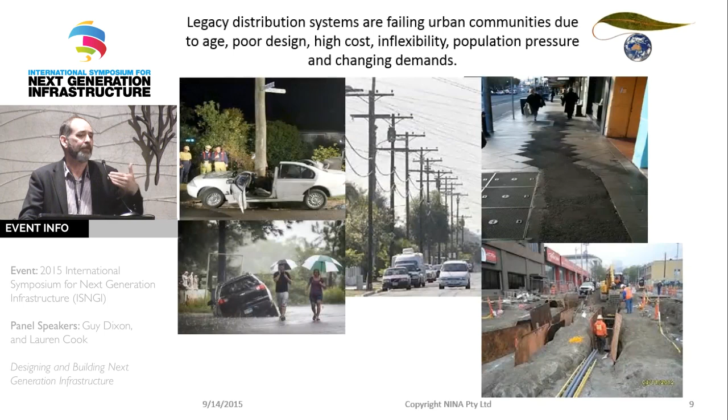There are 4 billion people living in cities now, and we have to start doing something. So let's start rethinking from the ground up.

I'll just jump through there. Civil costs, as I mentioned: 60% for broadband, 70% for water systems, 50% for power upgrades, 70% or more if you're moving underground, and stormwater is dominated by civils.

And we simply can't afford to be solving problems one by one. In Australia, for example, to dig up the streets to put one system in, such as the National Broadband Network, the civil costs are around $50 billion. Go to multiple systems - electric cars, grey water, etc. - and it all becomes cost prohibitive.

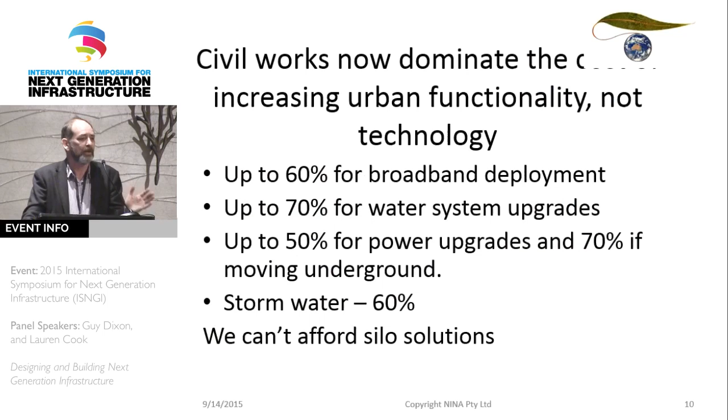So, I'll go to a picture. We need pictures, sorry. Here's the invention: the NINA access pathway.

So what we're doing is redesigning the curb and gutter. The curb forms the boundary line between the road surface and the pavement - if I say footpath, that's what we say in Australia - and the pavement. So let's reconsider our usage of that space as a multi-utility access system.

So the basic elements are, we have on the left-hand side a water channel sitting below the gutter, and that captures road water. If we capture road water and manage it separately, road water is only 15% of urban rainfall, but it carries 90% of the contamination of that urban stormwater.

So on the outside channel, we've got what I call the brown water channel, and on the inside, we have the clean water channel. Clean water comes primarily from rooftops, and typically the residential block's surface area will be 35% roof, which has perfectly good water falling on it.

The next channel just inside from the brown water channel is a power systems channel. So now we have at the curb, still tracking around all of our transformers and bits and pieces of the established grid, we've got the capacity to put in 3 different types of network.

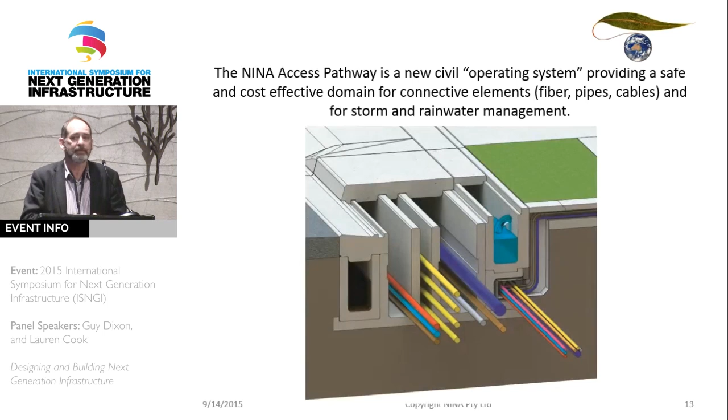But we also have a channel, so we also have space there for gas systems - so clean gas, so energy, gas, water, information, co-located in a common architecture. And so here's just an example: clean water, dirty water. Let's separate the two, manage them differently.

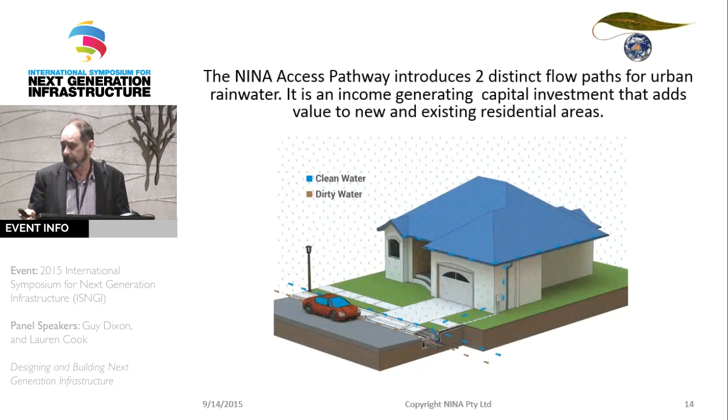Now we can start to think about the urban environment in a new structural unit, and the one that I've looked at is basically the residential block. My background is naval architecture, and for me, I like sort of things with defined populations and a nice boundary around them, and the fact that it's not floating just means it's not as interesting as a boat. But anyway, so this new block now has a series of dimensional characteristics which are really important to find out.

We had to survey 250 blocks in Australia to actually find out what the national average looked like. I did a similar study for California, and I've got the same metrics now.

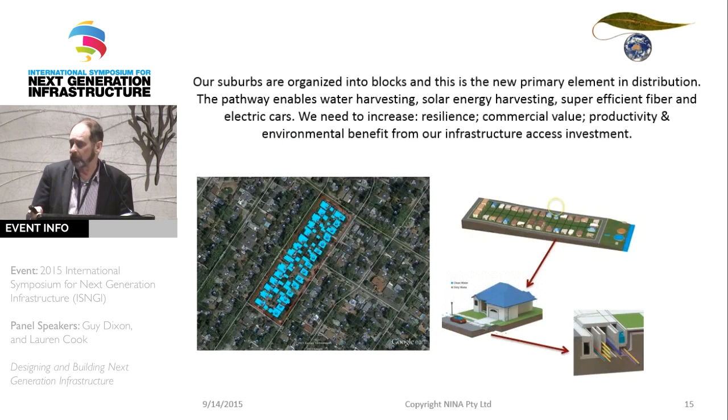With that data, we can now look at what the rainfall is. We know the area inside the curb boundary, and we can estimate what the annual water input into that block is, separating both the dirty and clean components. So we're integrating the block as a new, largely water and energy self-sufficient unit, and we'll be looking to integrate those right across the board.

The other thing is a lot of people have talked today about resilience, and resilience is we now have to redefine resilience in an environment of uncertainty. As much as we've spent globally more than $500 billion on the problem of climate change, we still have very little hard data to work with. So we have an environment of uncertainty where we're told things are going to get worse. We don't know how much worse, but we need design metrics.

The best way is to say, well, what's the safest place in the urban environment in which we can locate our utility services? And that's what we've done. We've taken the point where there is zero wind by scientific definition, otherwise you're ripping the atmosphere off the planet, and we've removed it from the threats of fire, we've removed it from the threats of flooding because we're managing the flow of water better in the urban environment, and we've removed power lines from the threat of having trees blow over them.

So in terms of resilience, this now looks a little bit like the old First World War slit trenches. On the front line, you got into a little narrow trench and that was the safest place to be, even when bombs and cannons were going off around you. So from a survival point of view, we've now dealt with those issues very specifically.

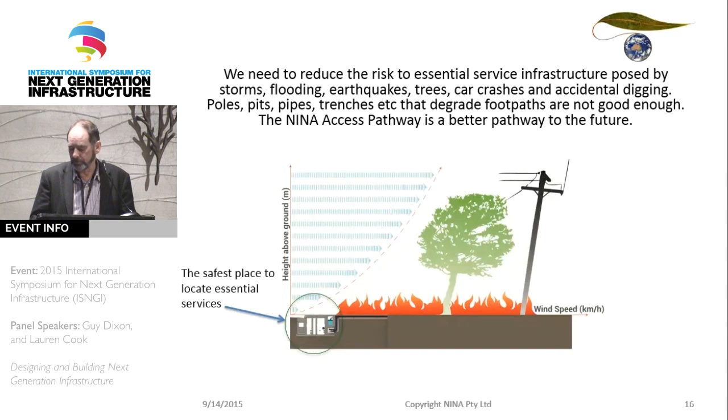We also have a new economic model because all of a sudden we've got an architecture with a range of functional capacities. So what we're looking at from an economics point of view is economies of scope. If these systems are sharing - we've got clean roof water as a resource, we can pay households to supply it to us and encourage them to be efficient. We've got road water as a community resource, small volumes, dirty, easier to clean. We're no longer pushing pollutants into riverways.

We've got a space for power systems - they're a new class of tenant in this commercial property. This is commercial property and the layer 2 elements are tenants in it that pay a lease charge. They get a lot of advantages from being there. There's no weather damage, there's no car crash risk, and the shared capital and operating costs in this environment, from all of our research, are much, much lower. So everything is working in a known, defined space.

We have in the world at the moment a very large number of applications - clean water, filtration, solar, electric vehicles, smart lighting. What we lack at the moment, though, is an operating system for all of those new technologies to work economically. Big data is great, but if big data is really expensive, then it doesn't really work. Smart cities need smart access in order to function economically and efficiently.

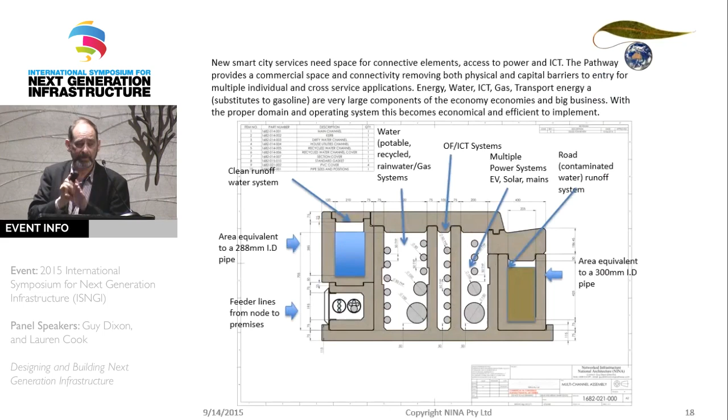I'll just give you some idea of the scales. Down at the bottom in the power channel, that's an 11 kV power line. It goes all the way up to 240, 415. Lots of space for fiber, lots of space for water systems, and a feeder, a redistribution channel. That side open channel is where things come out of it, and then the small feeder lines, to households come back along, and then they cross the footpath directly. So lots of stuff in one small space.

And we can't afford that. We can't afford it at a national, state, or community level. So we have to think about economies of scope and integration in order to make things work from a financial point of view.

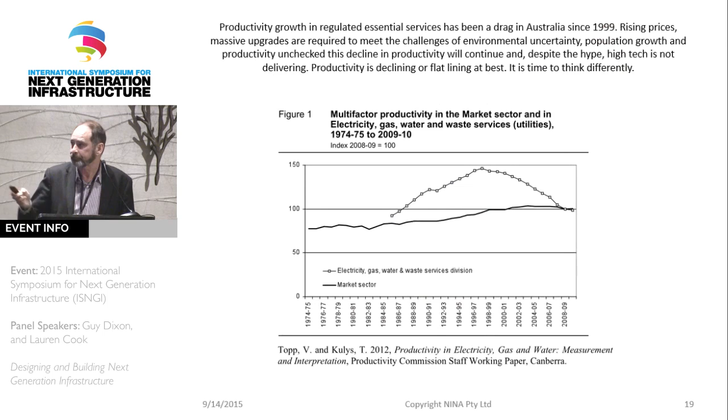I'd like to talk briefly about saving California. From my point of view, this is the first global-sized economy to go water critical, meaning they're having to sacrifice the supply of water to one sector and take it away from another. Even though agriculture accounts for 70% of California's water use, it's accepting a 25% cut. Residential and commercial are accepting a legislated 25% cut. In that environment, it is very difficult to consider how you build long-term growth and economic security in a state that is drying out.

In the city of Sao Paulo in Brazil, they were cutting water 3 days a week. It's a city of over 9 million people, and a lot of them live in high-rise. No water in a high-rise means you've got to go down 10 flights of stairs to find a toilet somewhere. It's an ugly situation to be in, but these are real threats that are taking shape.

California is particularly well suited, as is the United States, because you guys love organizing yourself in rectangles. You're the best at it in the world, and I congratulate you for that. I was able to get a snapshot of over 100,000 households because I could find about 50 locations, all with identical blocks, and they were massive. So there's just some examples there.

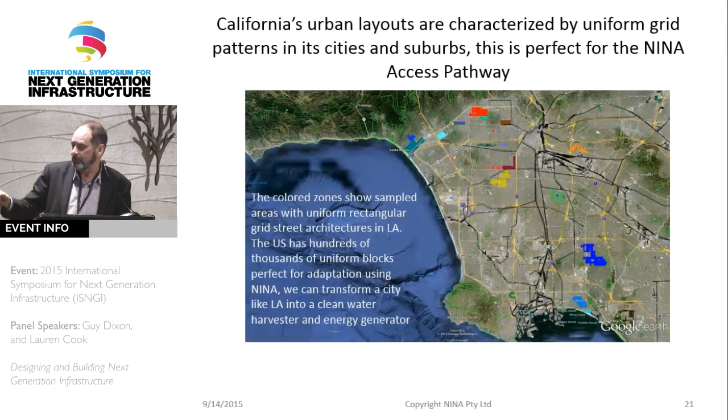So what sort of numbers do we get? In California, you've got around 18, 19 inches of rain per annum. That's a population-weighted average. When we're looking at a state level, we need to know how much water people are getting where, so the population weighting is very important. It gives you an idea of roughly what you can do.

You've got a perimeter of about 626 meters, 2,054 feet—I'm struggling with the old units here—but about 36 lots per block. And roughly speaking, there are 324,000 residential blocks in California alone.

So if we adapted California with the NINA access pathway, we'd get a roof water yield, at 35% roof area ratio, of around 1.1 cubic kilometers. That's 1.1 billion cubic meters of water, or 1 billion tons, just under 900,000 acre feet.

We can clean the road surface water—that's another half a cubic kilometer. Then we've got other surfaces around the block where we can pick up water, commercial buildings where we can pick up water, and then leakage reduction. At the moment in California, you're losing around 15, maybe 20% of your water, and that's considered the norm in America. It is not good enough for a water-constrained world to lose that much water.

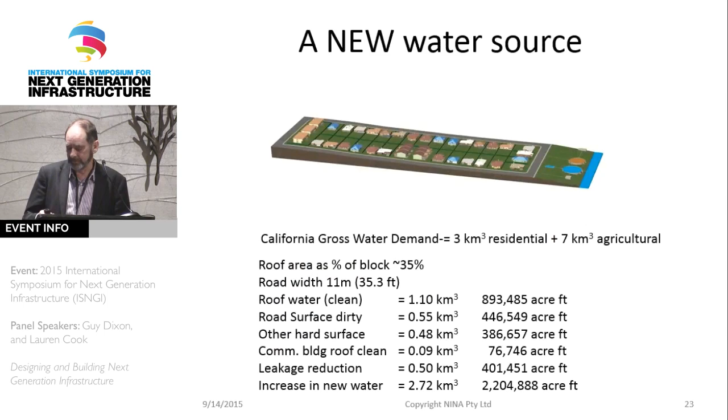So let's talk about and think about fixing both of them at the same time. This is basically what we're looking at: water generation, energy generation, super efficient distribution, and a massive increase. So we can start to talk about a new energy future. There is something like 77,000 gigawatt hours of electricity, unused potential on the roofs of California. So that's a big game.

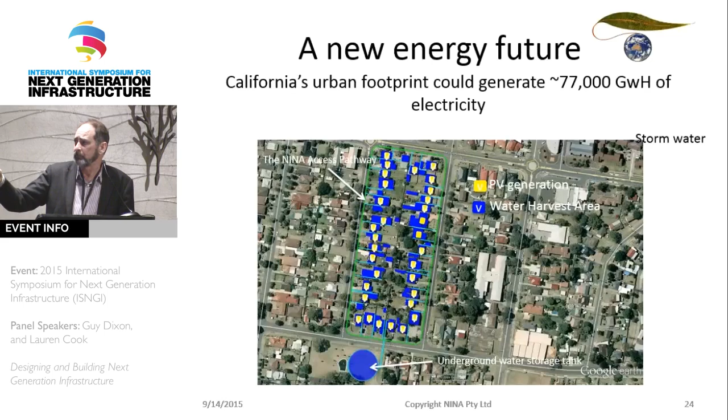We also have a new networking future. Networks are traditionally built on root and branch architectures. With the NINA access pathway, we're now putting effectively a loop around every single block, and loops are connected to loops. That means it's essentially indestructible. From an optical fiber point of view, it is indestructible because there are so many pathways between any points of A and B, and there is so much fiber there that you really can't damage it.

From a power grid transmission perspective, we need to be thinking in terms of research about more efficient, low impedance distribution networks. Nobody's done any work. I talked with an Australian power company - they've just spent nearly $3 billion upgrading their network, and they've still got 5% distribution losses, the same that they had. It's not good enough for the 21st century. One of the great research opportunities available is what do low distribution loss networks look like in the 21st century.

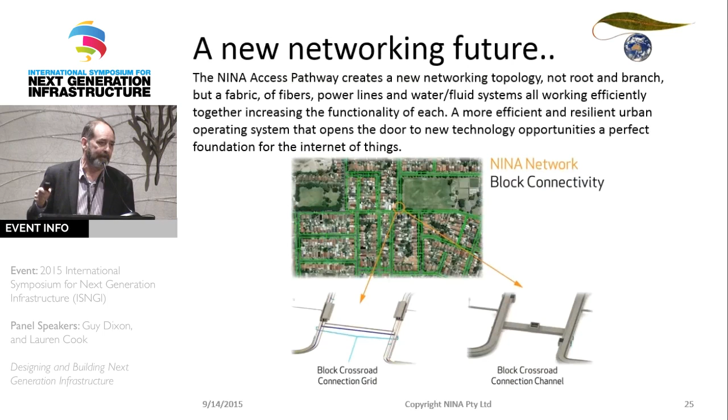So I think I'm going to have to click through. Health benefits: imagine a world where we have clean air, clean water, low noise, and we don't trip on the footpath and fall over and break our hips. That's a $1 billion cost to the health system in Australia alone. And we've got low toxicity in our natural waterways.

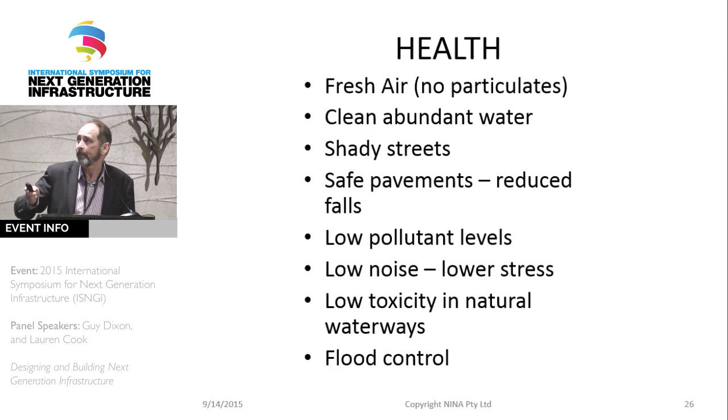Environmental outcomes, a path to carbon negative. If we combine urban adaptation and rationalization with a process of defragmenting our natural ecosystems - by that I mean we carve around little forest pockets, isolate them, and effectively they die - so a process of reconnecting the forests, getting the urban environment working, and stopping the drain of water out of the natural environment. Taking water out of the natural environment degrades it.

One of the least understood and least recognized forcing mechanisms in climate change is that over the period where we've seen an increase in atmospheric carbon, it perfectly correlates with the buildup of dams. We're concentrating water in dam systems, using it for agriculture, which doesn't store carbon in the environment, and we're removing from the natural environment the mechanism by which natural environments grow and sustain themselves.

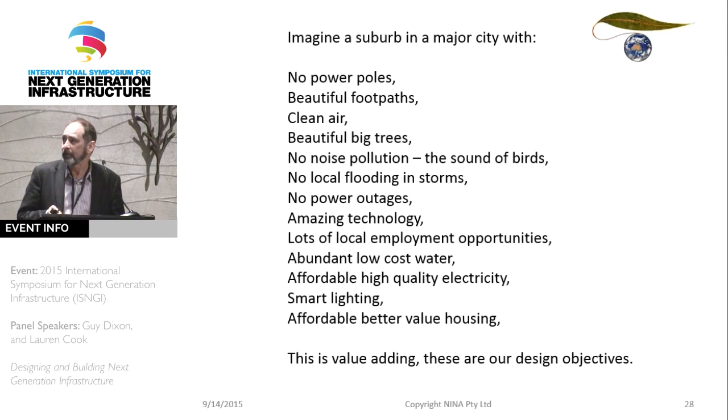So: no power poles, beautiful footpaths, clean air, big trees, no pollution, no flooding. We retain water in the environment, we don't allow it to flood, we don't allow it to overflow sewage systems, lots of employment, all the big tech you want. It's a good thing, and a better economic future.

The proposed financing model is that communities develop it as a property trust. You buy a unit in it - it might be the Capitol Hill South Infrastructure Access Unit Trust - but you buy a unit and you get a rate of return on that unit. That takes the funding burden away from central governments and gives a new opportunity to invest in a high rate of return business for local governments.

And if the community and the local government don't supply enough funding for it, then you open that up to pension funds and dedicated or specialist investments. It's a long-term, 100-year plus asset with a steady income stream, not reliant on the number of customers, but reliant on the number of tenants in the system.

Works better all around. The details of economics basically show that in Australia, for example, we already pay around $175 per month for embedded passive access civil infrastructure - poles, pits, pipes, trenches. Trenches dug 100 years ago are still at full book value; in fact, they raised them in value. So we're paying a lot of money, and this system costs around $12,000 per household in Australian dollars. It's got an income stream of about $1,800 just on the legacy utility services.

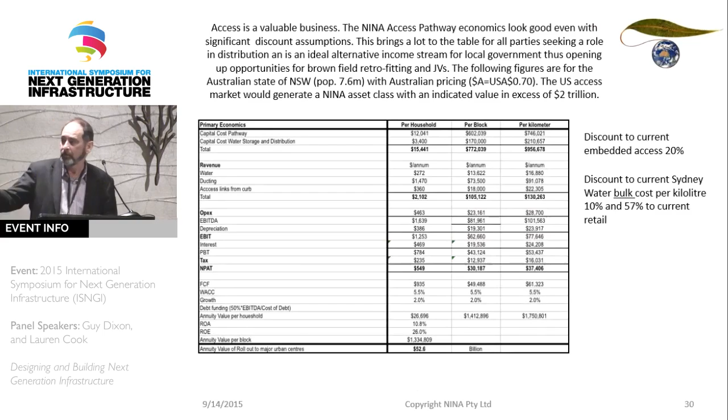So I think I've got to wrap up there, but quickly: there are lots of different layers of economic benefits. I think I've said all that before. So thank you very much.

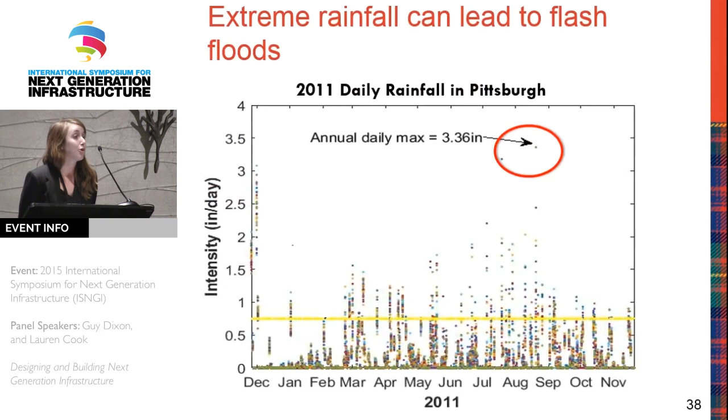So this is an example of a year in Pittsburgh in 2011. This is the daily rainfall, and I'm going to draw your attention to that little arrow. This is the annual maximum rainfall in Pittsburgh in 2011. This rainfall caused a flash flooding in the area, which led to 4 fatalities. It was a very sad event. A family got trapped.

So what did we do to resolve this issue? Well, we put up a sign, and this sign flashes when there's high water and says you cannot travel on this road. Now, some engineers would say this is a very good low-cost solution to prevent fatalities, and others would say that we would need to redesign the road since originally it was designed to be in a stream bed.

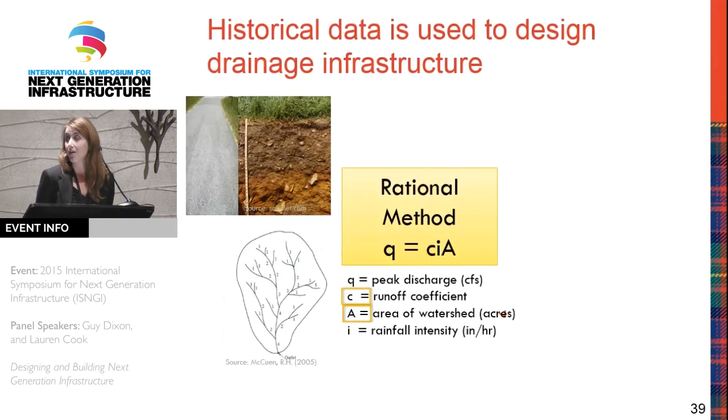So how do we currently design stormwater infrastructure today? Well, an older method is called the rational method, and what goes in is what we call a runoff coefficient, which is essentially the soil type. We also put in the watershed area, and what else goes into this equation is something called the rainfall intensity, which I'm going to talk to you mainly about today. How do we get these rainfall intensities?

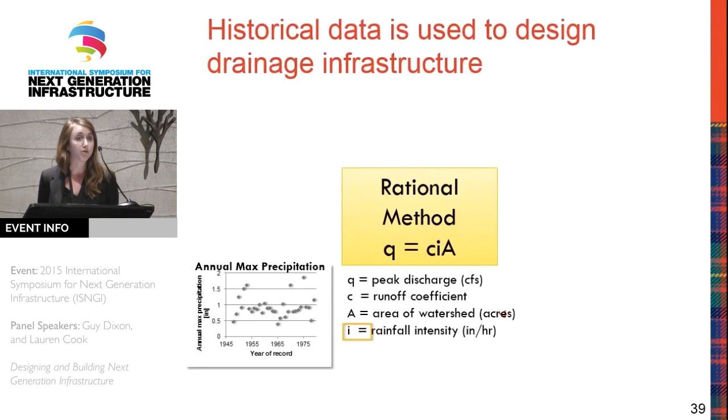Well, we start off with a historical record, and we usually take the maximum annual rainfall for the past 100 years or 200 years if we have the data. We take this annual maximum and create something called an intensity duration frequency curve, in which we input the storm duration that we'd like to design for, and we output a rainfall intensity, which we input into the rational method.

From this equation, we can get something called peak discharge, which is the very top maximum point on this curve, and under the curve is the total runoff volume. For those of you who are unaware, the difference in rainfall volume and runoff volume will be the amount of rain that is infiltrated into the ground. From this peak discharge, we can design things like culverts, or maybe even the stormwater management of the future, as the former speaker presented.

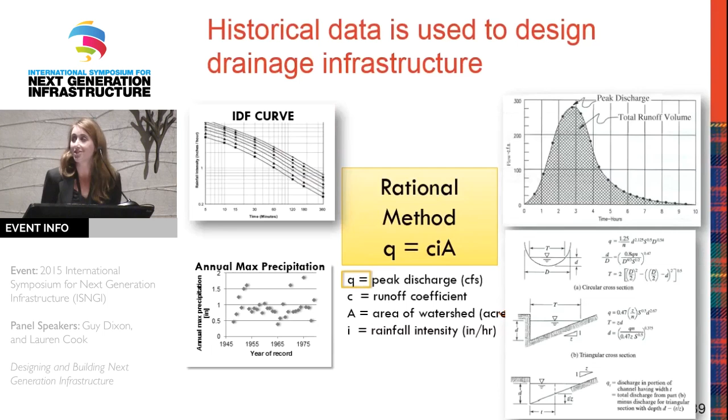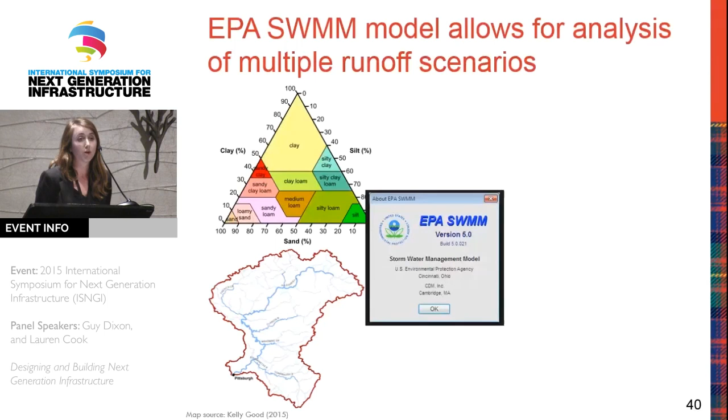But this is great, we have peak discharge. What else can we do with this? Well, we have another model, the EPA's model called the Stormwater Management Model. With this model, we have the same inputs, soil type, watershed area, but a little more complex. Instead of using an intensity duration frequency curve, we use a rainfall time series, and we can change these time series to test different years.

We can test a dry year, a wet year, or an average year, for example. And what we get out is peak discharge or any discharge, but on a time series, over a year or over a month, to see if our infrastructure can withstand the rainfall we're inputting into it. So this is great. Any hydrologist will say they love the SWMM model, and if we could go on using this forever, then my talk would be over now.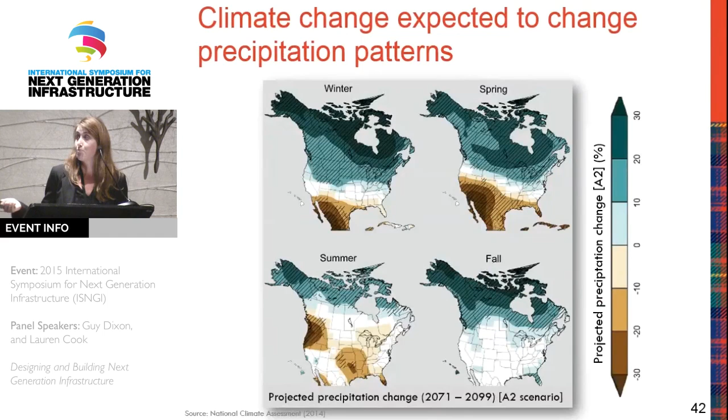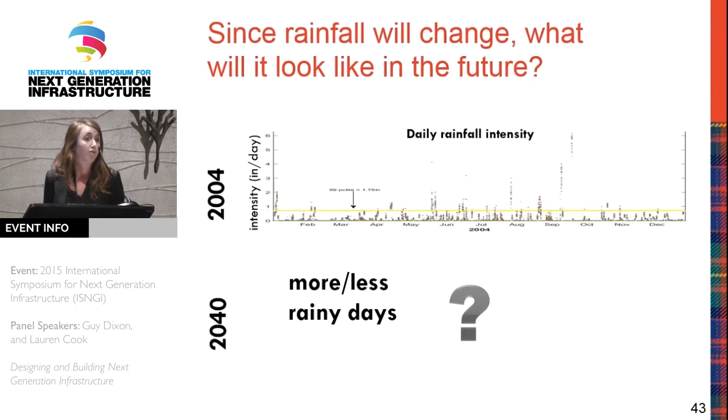So that brings us to one of the questions: what will rainfall look like in the future? Because we need this rainfall to design stormwater management in the future. If you asked me 20 years ago, maybe I'd say it'll look like historical rainfall. But if you ask me now, I'm going to say maybe we'll have more rain days in the future, or we'll have less. Maybe we'll have an increase or decrease in total rainfall throughout the year. Maybe we'll have more extreme storms, more rain coming down at one time. Or maybe we'll have longer periods between rain, just like we're seeing now on the West Coast.

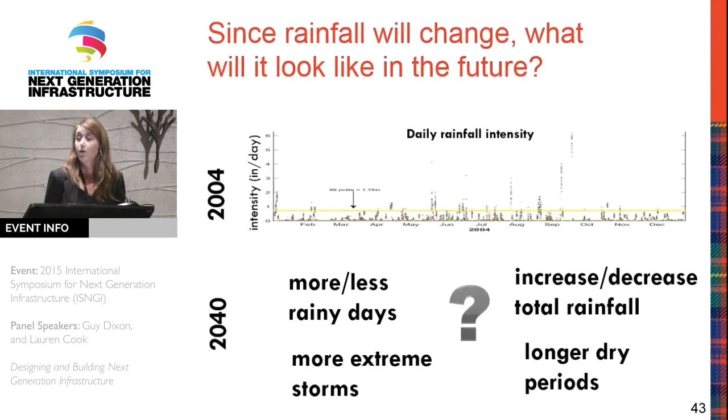This brings us to our research question: how can we use this data from climate models to inform rainfall for use in stormwater design, or really in any type of design where you would need rainfall information?

So we're looking today at a case study in Pittsburgh, and what is interesting about Pittsburgh is that it has very intense microburst storms, it has very steep slopes, we're in the mountains, and this leads to what I showed you earlier, flash flooding and fatalities.

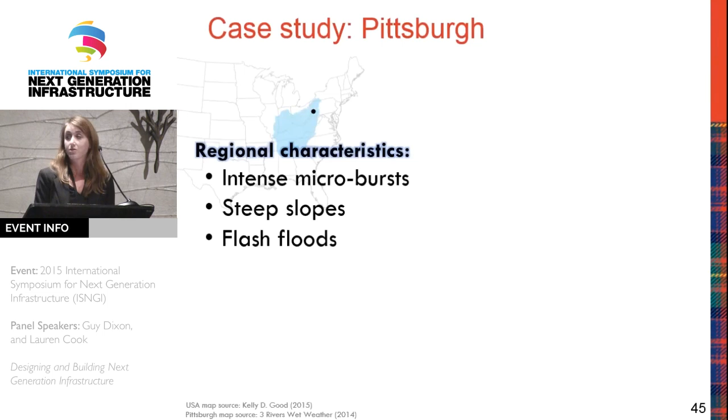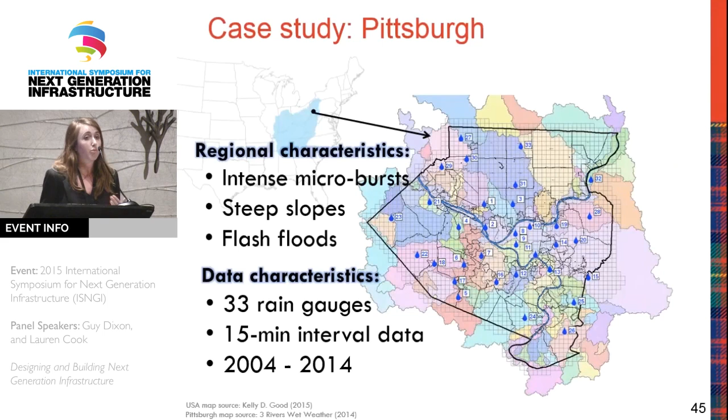So here we are in Pittsburgh. This is what the case study area looks like. We have 33 rain gauges. We have data on a 15-minute interval. This is excellent quality data, very small time step.

And we have it from 2004 to 2014. So one of these rain gauges, one of the 33, it looks something like this.

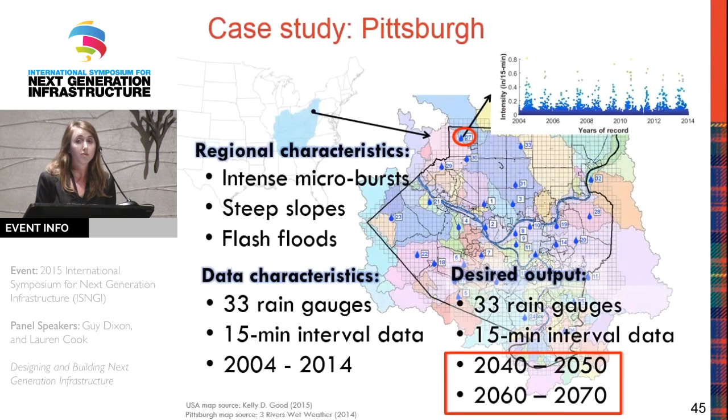Very long data set, and again we have data like this for each of these 33 gauges. So what do we want out of this? We want the exact same data, 33 gauges, 15-minute, but instead we want it for two future time periods, 2040 to 2050, 2060 to 2070.

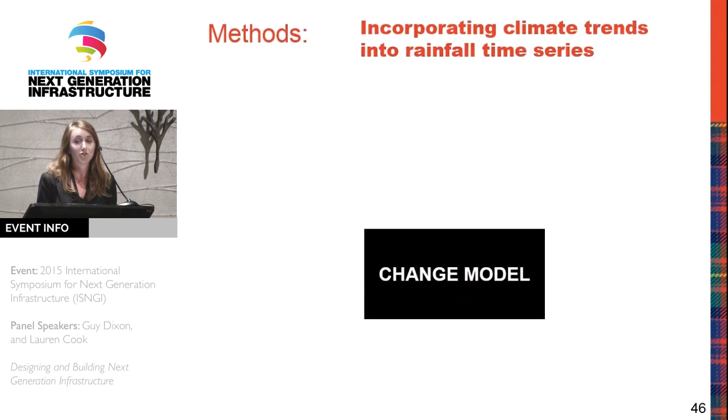How do we plan on doing this? We're going to use a model. Just think of it as a black box for now. We call it the change model. What goes in is the observed data. What comes out is two future time periods of rainfall.

How are we going to manipulate this? We're going to use climate data. We're going to select two different climate models, which I'm not going to go into big detail, but I will bring to your attention that these climate models are on a 3-hour interval, whereas the data we have is a 15-minute interval. Now I'm going to tell you just a little bit more about the climate models before I go into what is actually within the model.

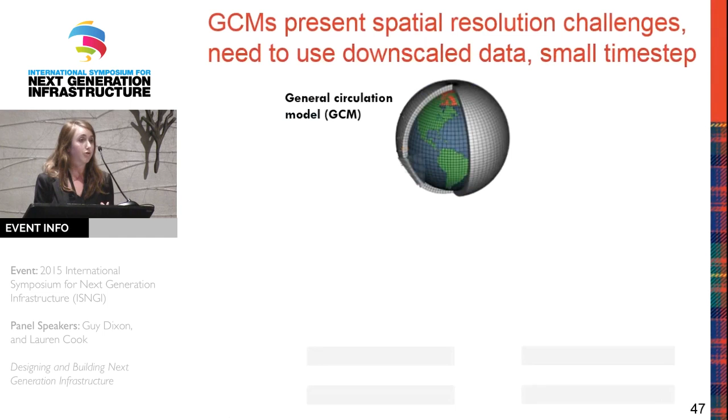But this is still too large for us as engineers to use, so we need to do something that's called downscaling. And there's two types of downscaling. I'm not going to bore you with the details, but one uses physical equations, which is called your dynamical downscaling, and one uses empirical or statistical relationships, and this is called statistical downscaling.

In the US, there's two different big data sources that have climate model data available: the NARCCAP, which is the North American Regional Climate Change Assessment Program, and there's also Reclamation CMIP-5 data, which is your statistically downscaled information. Today I'm going to talk to you about NARCCAP data. Why did we choose this NARCCAP data? Well, because it's on a 3-hour time step, and this is the smallest time step that's available in the US for a climate model today.

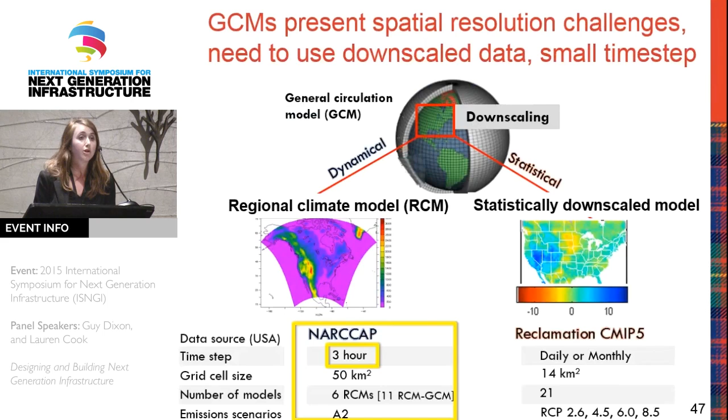And also what I want to bring to your attention is that within this data set, there are 6 different regional models to choose from. During the research, we selected 2 of these, which were closest to the observed data. I'm not going to go into this right now, but if you do have questions, I'd be more than willing to talk to you about how we selected these models.

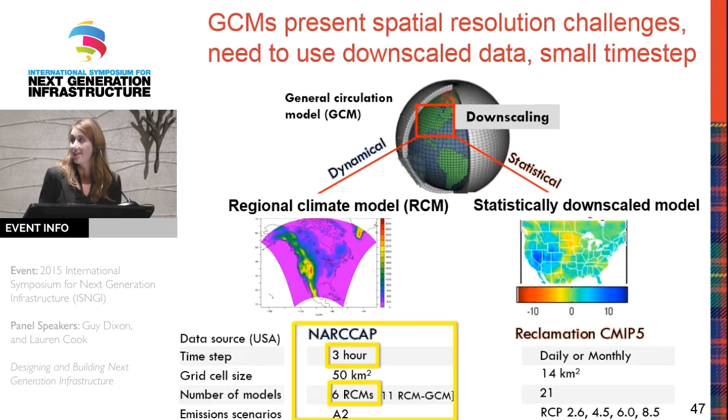Now, I've talked to you a little bit about the climate models, and now I'm going to talk to you a little more about the change model that we're using. It's kind of intense, a lot of equations, so don't get overwhelmed by the details. I'm going to bring you back to the big picture at the end.

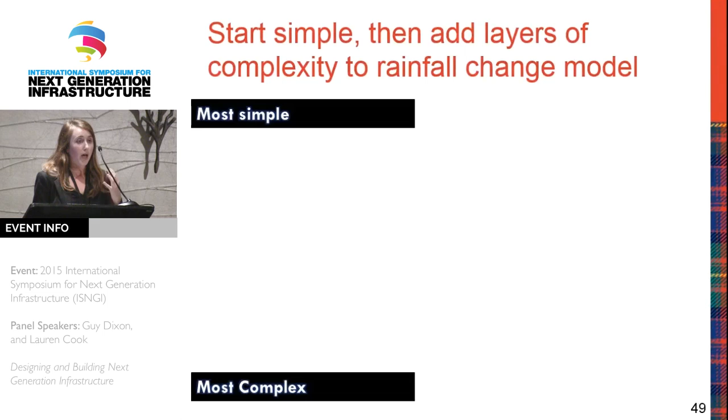So when you're building a model like this, you don't want to jump right into the most complex model. You want to start simple and add complexity. One of the simpler methods is called the delta change method, and a more complex method for building rainfall is weather generators.

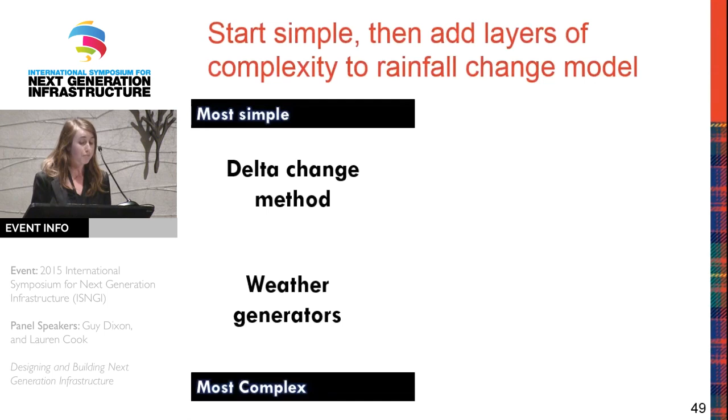If you want to add complexity within each of these methods, you're going to look at different rainfall parameters. Again, these rainfall parameters we discussed before: you can have the number of rain days in a year, you can have total rainfall, you can have the number of days between rain. All of these things are potentially going to change in the future, and all of these things you will have to apply to the rainfall time series you're trying to forecast in the future.

So what I'm going to talk to you about today is a rather simple model in the grand scheme of things, although you can let me know at the end how simple you think it is. That is the delta change method, and I'm going to be looking at intensity percentiles, so sort of the probability that we will get a certain amount of rainfall in a certain period.

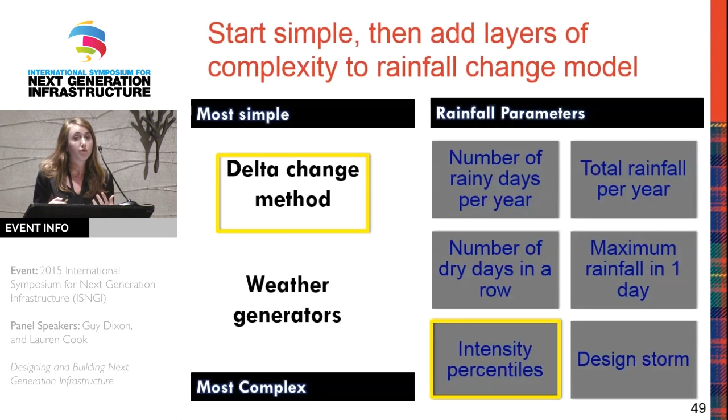Step 1 is you want to select the time period that you'd like to have. In our case, we are selecting a 10-year period. This comes from the observed data set that we have.

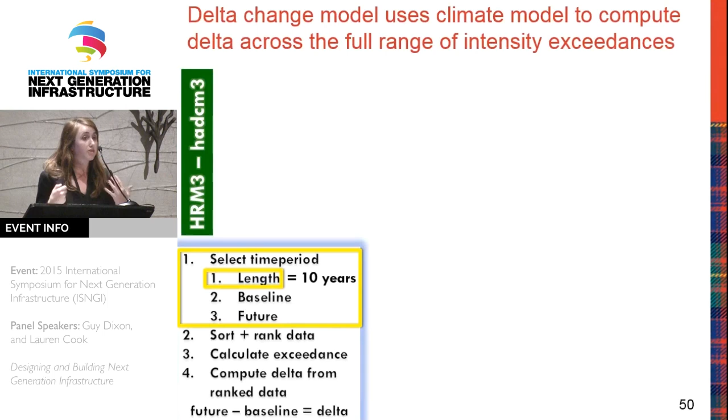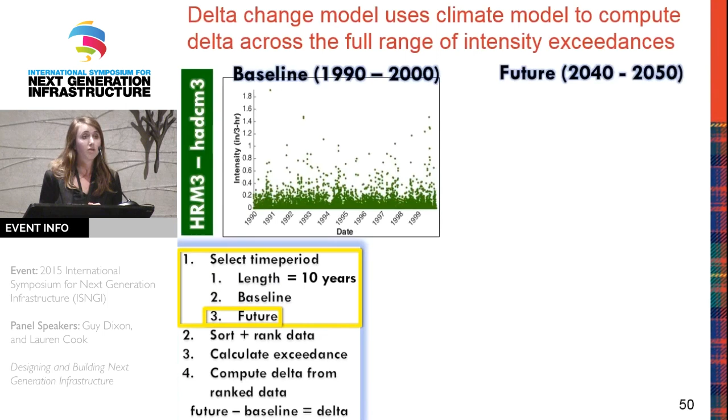Step 2 is you select your baseline time period from the climate models, which we selected to be 1990 to 2000, which is closest to the observed data that we have. Our future time period, 2040 to 2050, looks like this. This is just the first future time period that we're selecting.

Your next step, in order to be able to compare these two time periods of rainfall, you cannot simply compare the time series because you cannot compare day 1 to day 1 in the future, because it doesn't make sense. So you have to rank and sort the data in order to compare the two.

So first you rank the data with the highest rainfall volume in rank 1 and the lowest rainfall volume in rank about 30,000.

Next, you're going to calculate the exceedance probability, which is the probability that you will have a given amount of rainfall - for example, you can have a 1% exceedance probability that you will have about 0.25 inches of rainfall in that time period or more. It's a little confusing, don't get lost in the details, but if you're interested I can tell you more in the end.

So now that we've calculated the probability of rainfall, where more volume of rainfall is less likely, we can now take the delta. In order to do so, you take the future, you subtract the current, and you get the delta of the climate models. This is the future climate subtracted by the current or baseline climate - you get a delta.

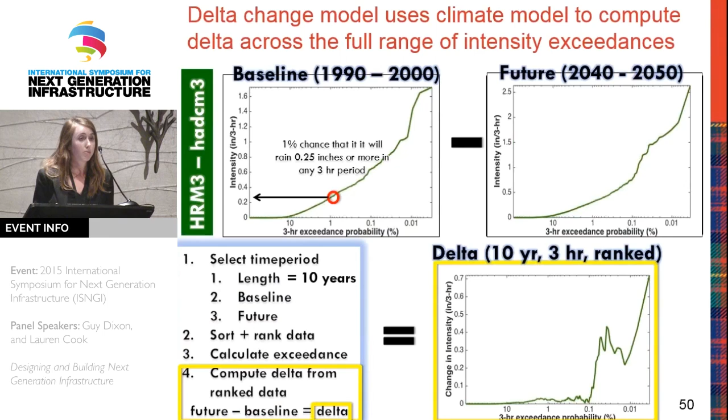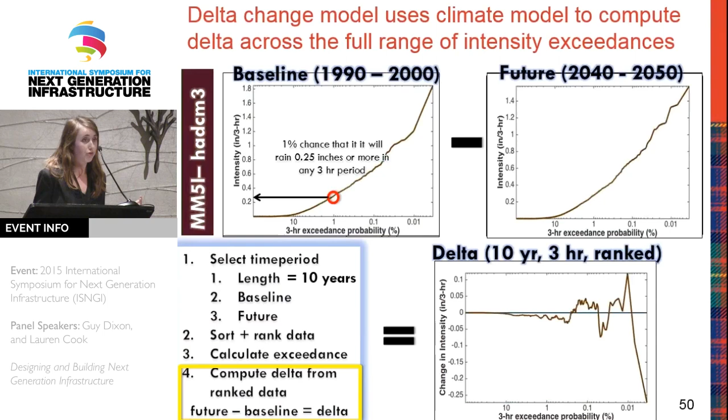So like I said, different models can give you different trends. You can have an increase in rainfall for a given exceedance probability, for example the 0.01%. Or you could have a decrease in rainfall for a given exceedance probability, for example here about 0.2%.

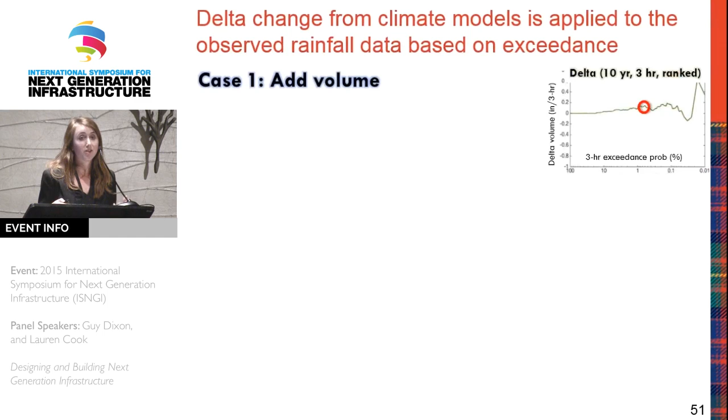So what do we do when we have this added volume? Remember that we have this delta on a 3-hour interval. However, we want a 15-minute interval. We call this disaggregation - taking this big volume and putting it into smaller volumes.

So here's our 3-hour delta, and this is, for example, for the 1% exceedance, we have this much additional rainfall. So we're going to find in the observed data that same 1% exceedance probability. And within this 1% exceedance, we have 8 periods of rain, 15-minute interval periods of rain, within the 3 hours.

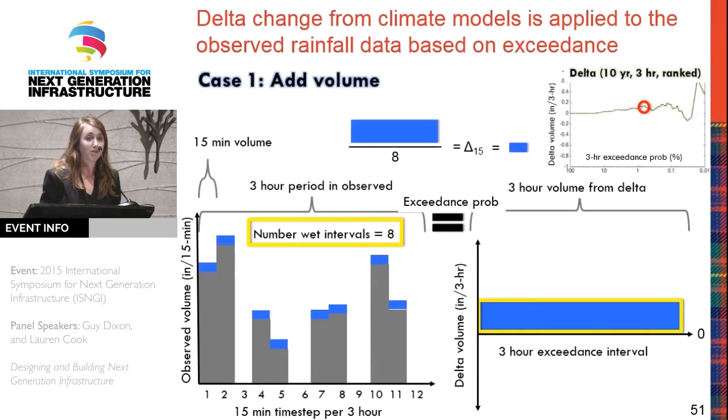What we do is divide the delta by 8 - very simple method - and we're going to add it on to our observed data. You can do the exact same thing if you're subtracting volume: you divide the volume and you subtract it off.

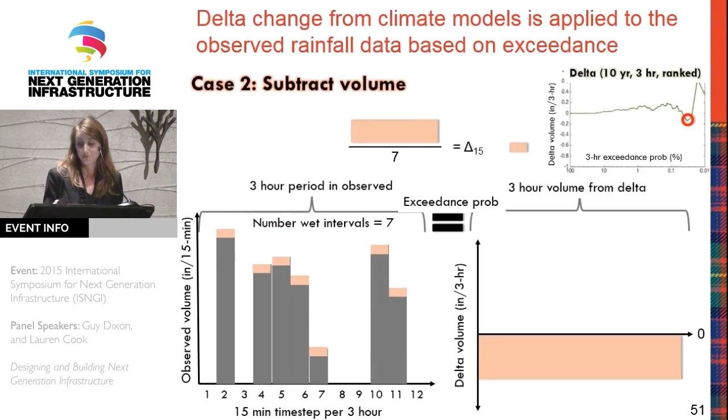Now that I've talked to you about what we actually do in the model, how we add the volume or subtract the volume, I'm going to talk to you about some of the results that we got out of the model. I'll talk to you about 2 main conclusions that we found so far, and we still have a lot more work to do.

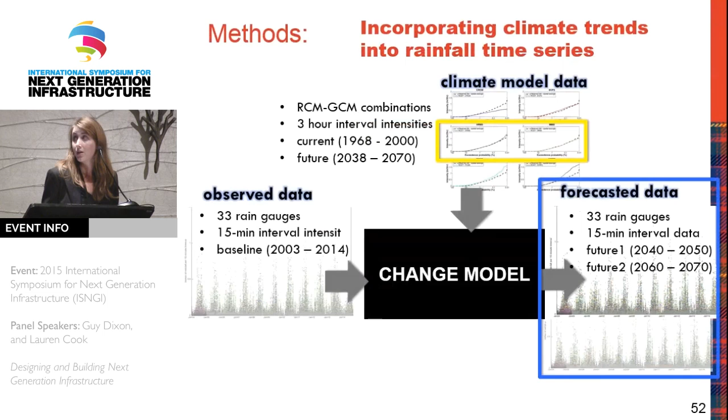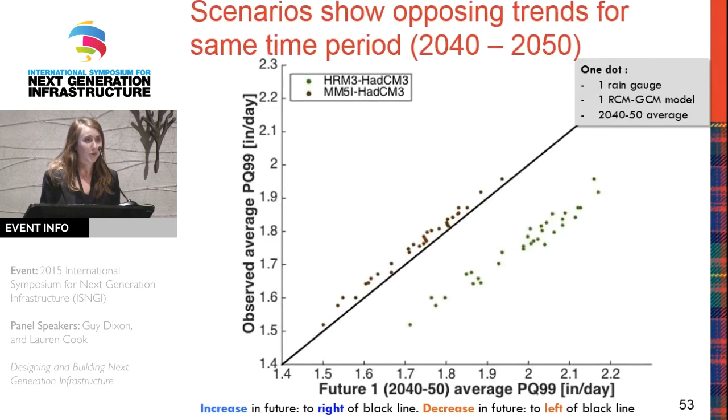So opposing trends in the early time period from two different climate models, and there are many more climate models, so we could get even further opposing trends, but I'm not going to bog you guys down with that.

Second conclusion I want to bring to your attention is looking across time periods. So now we're looking at the 2040 to 2050 time period, and we're comparing it to 2060 to 2070, as we move along in the future.

As an engineer, we want concrete numbers. We want to know the probability that this is going to be accurate. Tell me some numbers, tell me some statistics. And the problem is, we don't know. We cannot assign probabilities to each climate model because they are uncertain, because we do not know what the probability of them being accurate is.

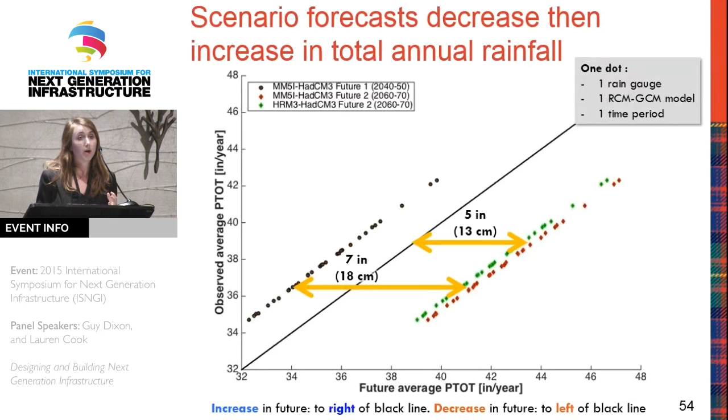To close today, I want you to take away three big messages. First of all, rainfall is changing, and we have to figure out how to look at rainfall on a small scale. The delta change method is one way that we can take climate information and bring it down to a smaller scale.

We can create these rainfall time series using the delta change. However, we're still going to get varying results. One model will say we're going to get more rain, one will say less rain, and some will say we're going to have an increase and then a decrease, or a decrease and then an increase over time.

Since we have these different futures, conflicting trends, and different scenarios, we're going to have to plan for all futures. We can no longer take the expected value. We have to completely rethink how we design, and rethink how we add up these numbers.

One strategy we're starting to research at Carnegie Mellon is called minimizing regret. This involves minimizing financial regret. You want to minimize fatalities, which cost a lot of money, but you also want to minimize the cost of your infrastructure.